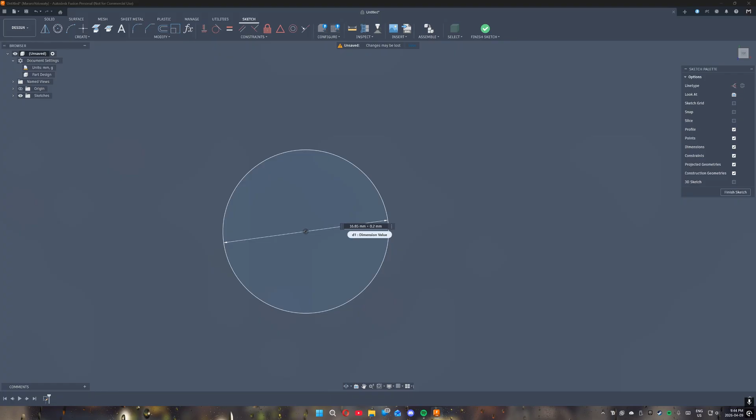What you can do is double click on the dimension here and add stuff. For a nice tight fit that's still removable, not just a one-time use, we're going to add 0.1 millimeters to the whole circle. Since we're working on the diameter, which has two sides, we actually want to add 0.2, because adding just 0.1 would only add 0.05 to each side. So to add 0.1 bigger all the way around, we need 0.2 total.

We're going to press enter there, that's our whole size. Now my idea for this little coupler is it's just going to wrap around maybe about 2 centimeters down, and we can play with that dimension. Looking at this in person, I see 2 centimeters and think that's not long enough, they might still wiggle a little bit. So I'm actually going to go up to 25, so 2.5 centimeters, and we'll keep that measurement in mind.

We're going to go back in Fusion here. Now with this base circle, I want the thickness of the 3D printed wall. Usually the minimum wall I'll go is about 2 millimeters, all the way up to 5 if I need something super thick. This one I'm going to go 2.5. This measurement is just kind of the strength you want on your part.

So I'm going to finish that sketch. To orbit around, I'm just pressing Shift and middle click, and that lets me orbit around in 3D space. You can see on the top view cube it's rotating. Now I'm going to press E to extrude. Again, we said we wanted that 25 millimeters, so we'll do 25, and press OK.

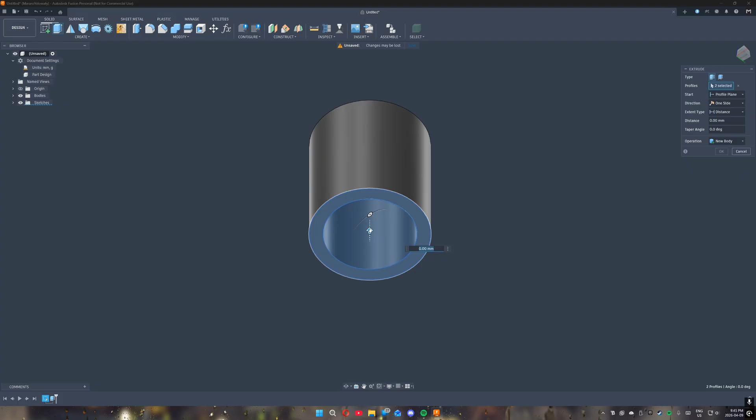So this will slide onto one end of the shaft. Now, because we don't want it to slide all the way on the shaft, we just want to stick it on the end. I'm going to rotate to the bottom here, and we're going to extrude both of these down about 3 millimeters. That's perfect, so we'll click 3 there. Now you can see if I turn off the sketch on the left side, it has a cap, so the stick will only go in so far.

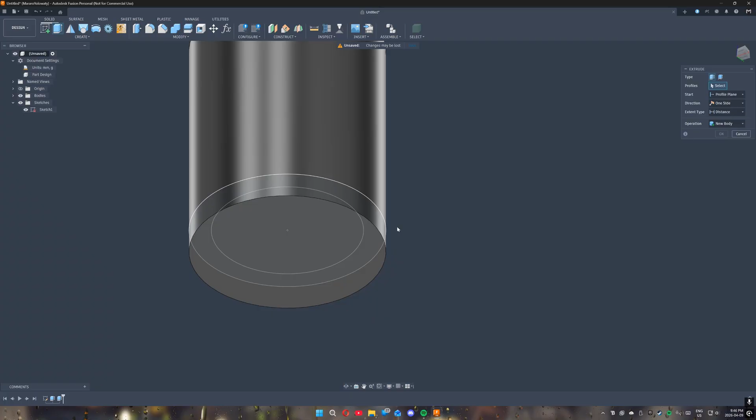Now I also want to find a spot for the other stick. I'm going to press E to extrude again, hover over that sketch profile—make sure you're not on the bottom of the plate, you don't want to extrude the whole circle, just that one part of the sketch. If it doesn't let you select it, you can turn the body off on the left side, select your sketch, then turn the body back on, and it'll let you select whatever you like.

Now I want to also go 25 down, but if I go 25 down, that 3 millimeter cap is getting in the way. There are a couple ways you can offset this. One, you can just add 3 to it, going 28, and then set it to join, and that'll give you 25.

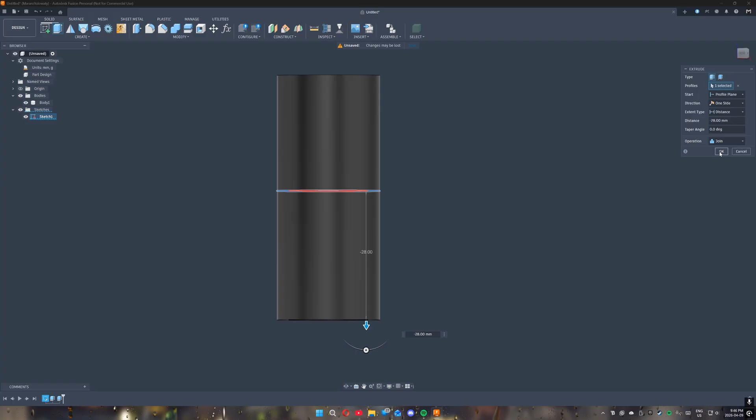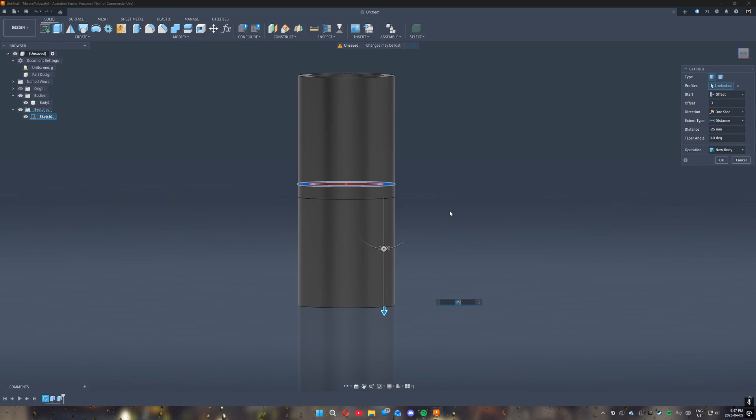If you don't want to do math, you can set it back to the default and on the right side set an offset of -3. Now going back to our 25, that starts our extrude from that 3 millimeter offset. We can go up or down, and it resets the base of wherever the extrude starts. So we're offsetting at -3, meaning it starts 3 millimeters lower from where we actually have the profile, then we go 25 down from there, and that's our part.

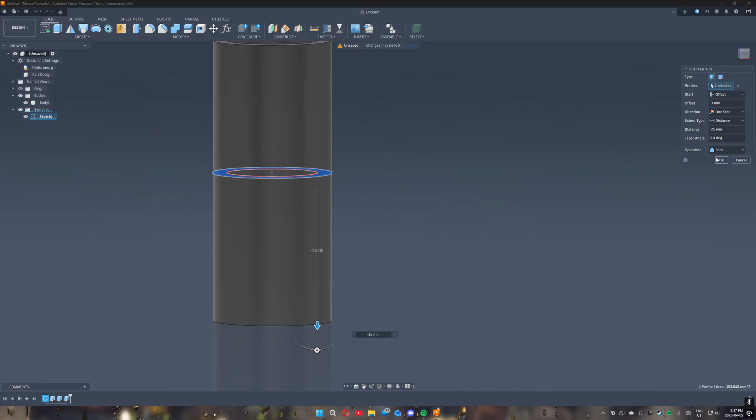On this last extrude I did something wrong. You might ask why there's this line here, and on the left side you can see we have 2 separate bodies. What happened is in this last extrude, the operation was set to new body instead of join. When we join, it creates one solid structure. When we click new body, it extrudes and makes Fusion think it's a different part, which we don't want.

So we're going to go into the extrude, change it to join, and click OK. Now if we turn off our sketch, we can see this is exactly what I was looking for. Super simple—it has spots for both of the wooden dowels to fit into both ends. It should fit because we added that little tolerance back in the sketch, just 0.2 millimeters bigger.

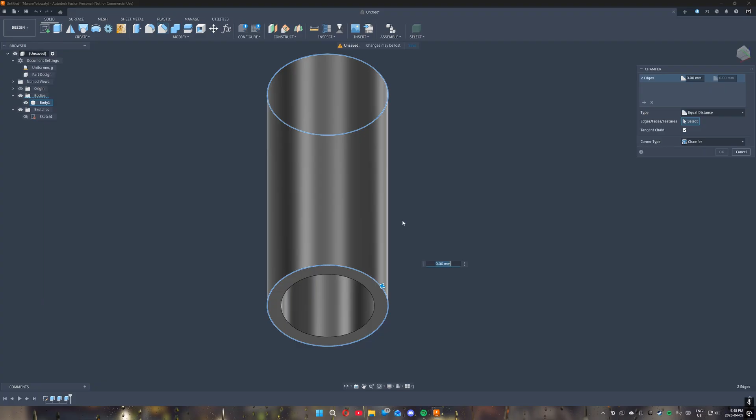That looks all good. Now just for looks, to make it a little cleaner, I'm going to use the chamfer tool. This puts a little cut on all our edges. I'm going to set it to 1.5, and I'm actually going to go 2 distances, which lets you change the distance.

Again, this is just for cosmetic reasons, so it has no functional purpose. Actually, technically it makes it weaker, but I think it looks cooler, and that's always a good thing. So yeah, chamfer is a really handy tool—I always love cutting my corners.

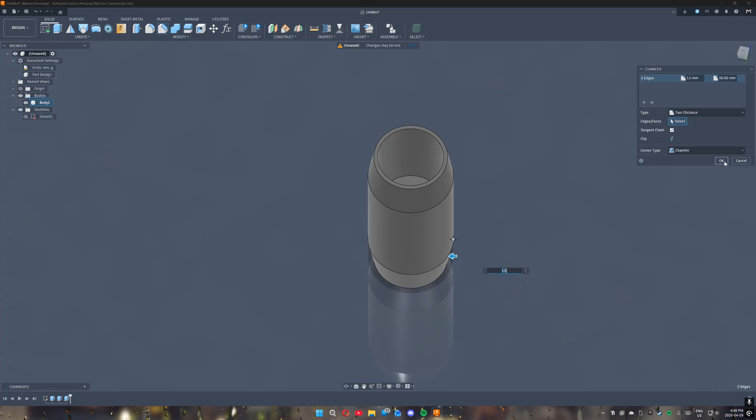Now the last thing we need to think about is 3D printing, since we're going to print it like this. I'm going to use the analysis tool here. It'll start at the bottom layer and slowly go up and up, and as soon as it reaches here, it has to bridge across this whole gap. If this circle was any bigger, we might want to do something about that—maybe put a cut corner on the inside so it has to bridge a little smaller, or use support material.

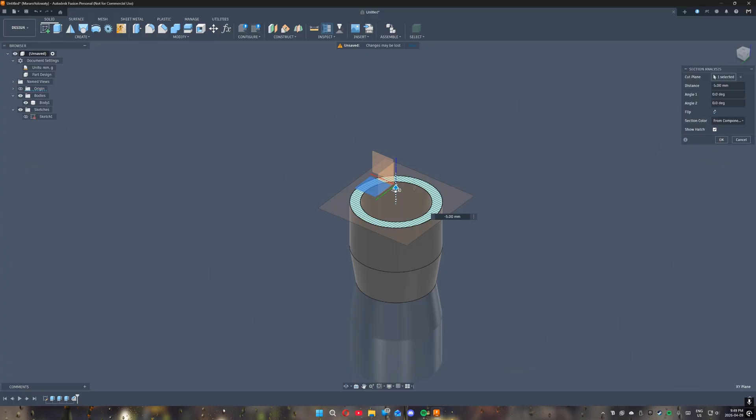Because this is only 16 millimeters, my printer can handle that, so I'm going to leave it. I'll show that in the slicer as well—this is going to print totally fine. I am going to put what's called a brim on it in the slicer. So that's our part, it's done, and it looks great.

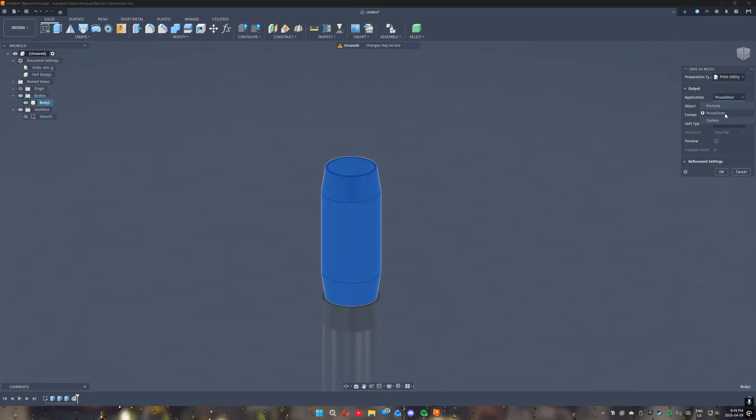Now, to get this into the slicing program, we're just going to right click on this body here. This was covered in a previous tutorial a couple months ago—we're going to save as mesh and export to an STL in millimeters. I'm going to save this, and then open it up in Prusa Slicer and catch up with you guys.

Okay, here we are in the slicer. I've just imported it again with this add tool up here. Here's our part, this is what it's looking like. For basic settings, we're just going to go 0.2 millimeter layer height—very standard. I'm also going to add that brim, which adds a little extra support on the bottom since our bottom surface area is quite small.

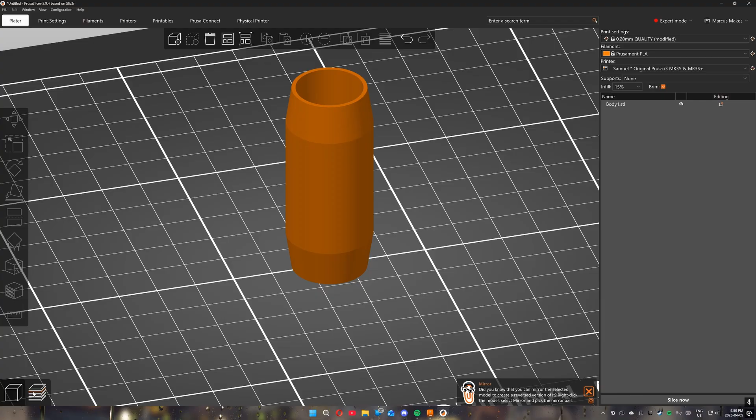I'm not going to change much else. It's a very thin part, it doesn't have to be super strong, so I'm not going to worry about too much else. We're going to click slice, and we can watch through and see right here on this layer.

So you can see it's going to bridge across this gap. Again, because it's small enough and on the inside of this part, I'm not too worried about it—it should be quite a simple print for it to do. This looks great, that's the whole process. I'll print it out and show you when it's done.

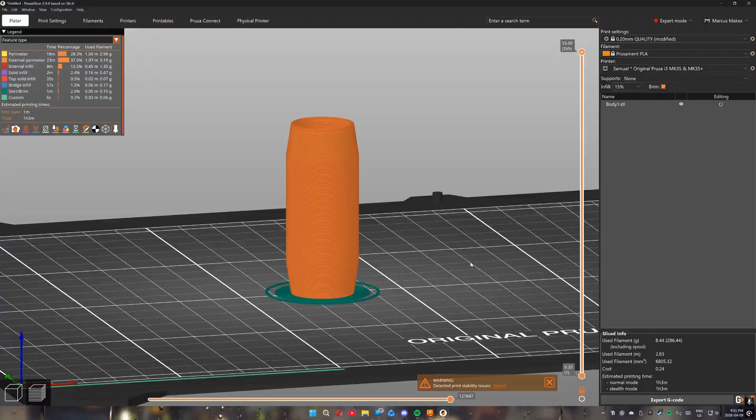Okay, here they are just off the printer. As you can see, they turned out exactly like we modeled them, with the chamfer on the edge. They have that cap at the bottom and look pretty good. Now the main thing we want to check for first is if our tolerance fit—perfect, not too loose, it comes off, it's a tight fit. Again, that's that 0.1 millimeter gap all the way around, we increased it by 0.2, and that's perfect.

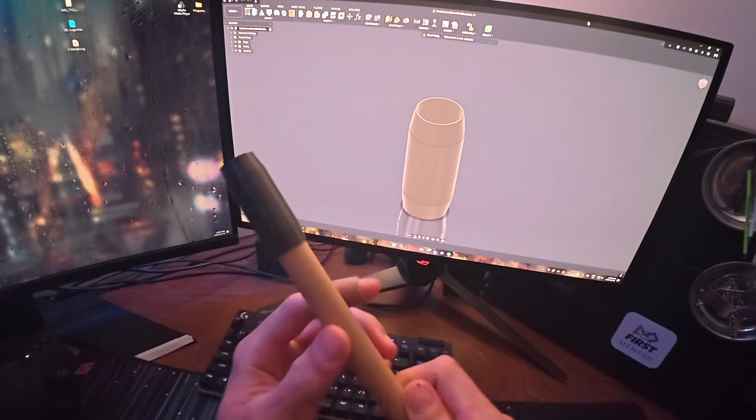I printed 2 of them off because I need 2 of them for this thing—it's not just one useless part. Obviously you don't want to waste plastic. This does have a purpose for a different, totally random thing. I just thought I'd use it as an example because it's quite simple and that tolerance works perfect.

Works great. Anyway, that's how you model a part from start to finish, and hopefully that was helpful in some way, shape, or form. That's it.